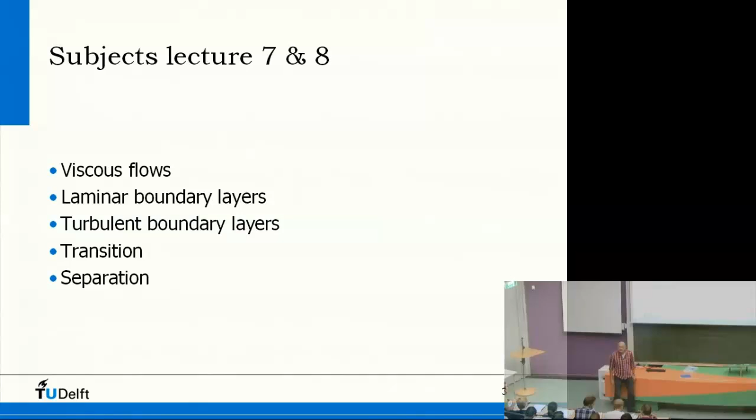So it's about viscous flows, laminar and turbulent boundary layers. You have read all about that, maybe heard all about that from Professor Bijl.

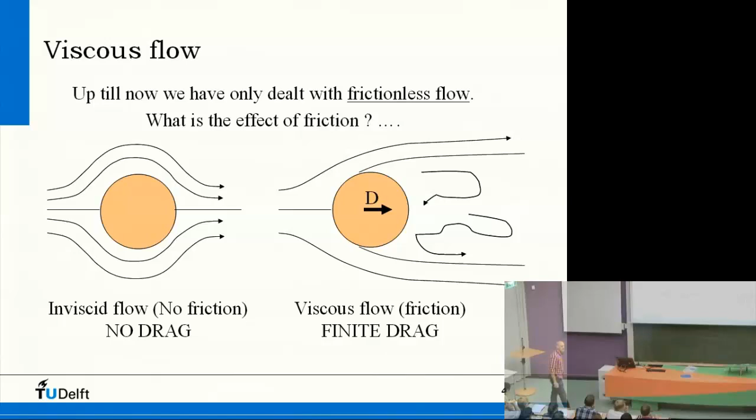And if you come to that conclusion, of course there's no drag, because the biggest force that is acting here is the pressure drag. There's so much pressure drag here, more than viscous drag, that there's a very high drag force on a sphere or on a cylinder. So this was called the paradox of D'Alembert, because he saw that there was drag and he couldn't calculate it. Of course, in due time, people could do that, but in the time of D'Alembert, which is some 200 years ago, that was impossible. Okay, so in real life there is friction, but not only friction, also pressure drag.

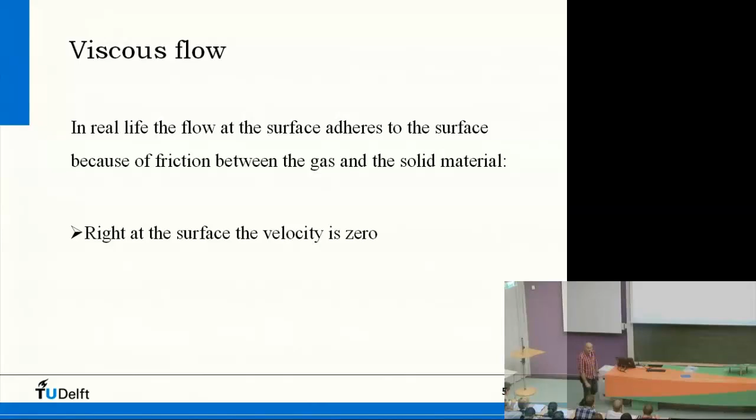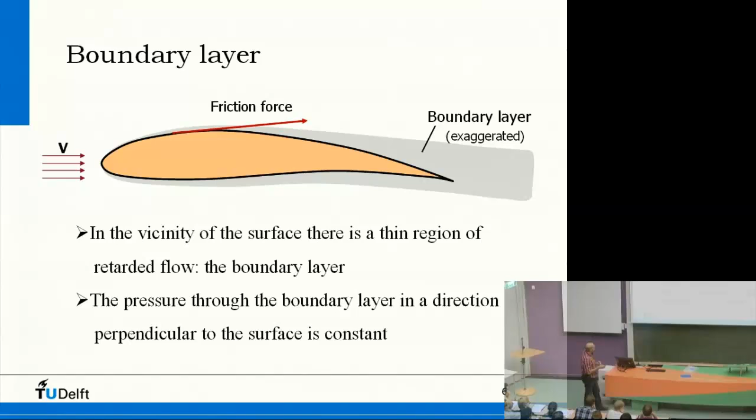You've seen the boundary layer, exaggerated here, but the boundary layer is this piece of the flow very close to the surface that is the result of the friction of the molecules of the air or the gas or the fluid along the surface. And that creates a boundary layer, so a thin film of air that is retarded by the friction force. Inside the boundary layer, because there is friction, we saw that if you look at how Bernoulli's law was derived, then you excluded friction. So, because in the boundary layer there is friction, you cannot calculate with Bernoulli's law. It's not valid there. Well, I will skip this because you've seen that.

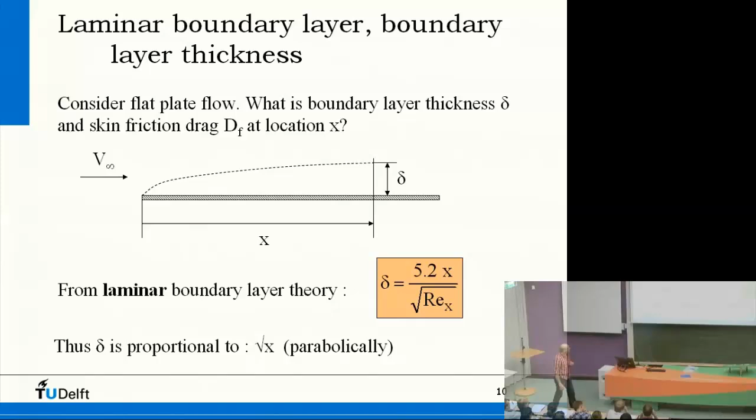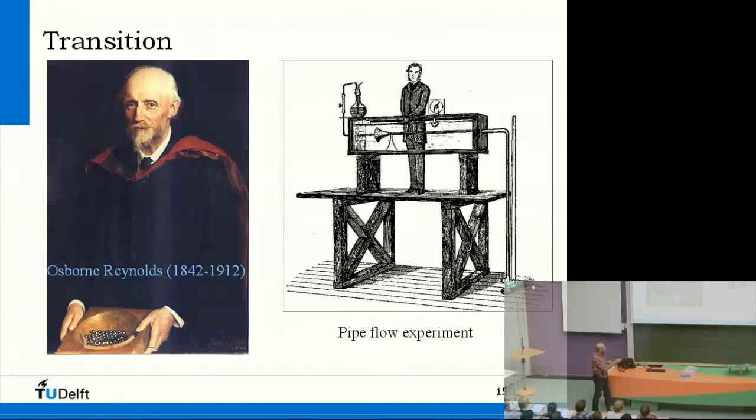Osborne Reynolds was the guy that looked very closely at the type of flow in a pipe. So there's his setup. There was this pipe here with an inlet, and he put dye into the flow. And what he saw at very low velocities, a combination of the velocity and the friction, was that there was this very nice layer of fluid going through the pipe. But when he increased the velocity, and this so-called Reynolds number was increased, then he saw that at first there was this very thin, very nice layer, and then suddenly there was what we later call turbulent flow inside the pipe. And if he further increased the velocity, then this phenomenon occurred earlier in the pipe.

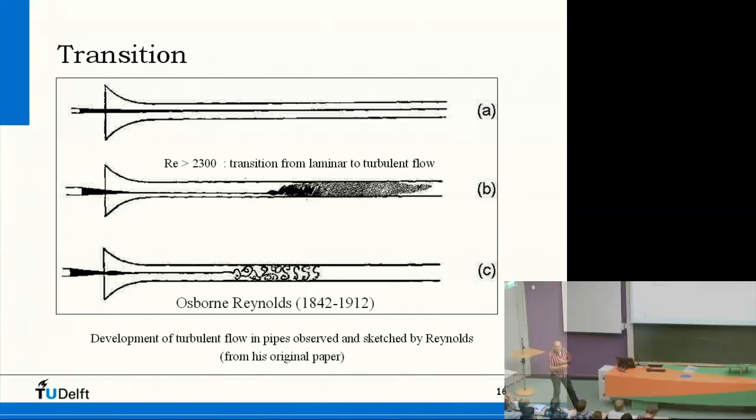And then he came up with his Reynolds number, saying that whenever you have two configurations, two setups, for instance a wind tunnel and a free flight, and if the Reynolds number is constant, then the ratio of the mechanical forces, so the mass forces and the viscous forces, are the same in both situations. So you can compare both situations.

Very nice, because if you want to do wind tunnel measurements and you have a certain chord and you want to replace that chord in the wind tunnel, and you don't have a big wind tunnel, so you must have smaller chords, then if you keep the Reynolds number constant, then you can compare the flows. Everything that counts for the wind tunnel also counts for the free flight.

And the Reynolds number says something about the velocity times a certain characteristic length. And for wings, that's of course the chord. So velocity times chord divided by something that says anything about the viscous flow. So honey, for instance, is very viscous. So this kinematic viscosity, nu, is very high. And gases, of course, are very non-viscous. So if these ratios of these parameters are constant, then you can calculate with the same forces. Very convenient for wind tunnel measurements.

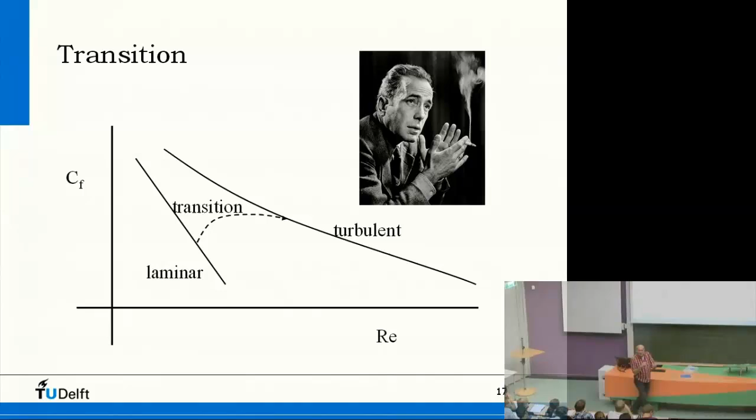And transition will not take place suddenly, but somewhere in the flow you see those turbulent spots. They call it turbulent spots, that here and there you see some small vortices coming up in the flow. And if you put a microphone inside this flow, it sounds strange, but it's really the sound that you hear. A laminar boundary layer is just a sort of small, soft whistling sound. And then if you have a turbulent boundary layer, it's a rumbling sound. And somewhere in between, these small vortices, these turbulent spots, give you the idea that turbulence is coming on.

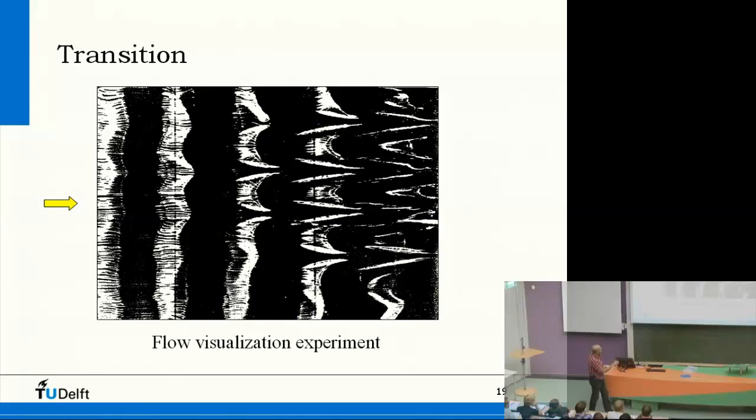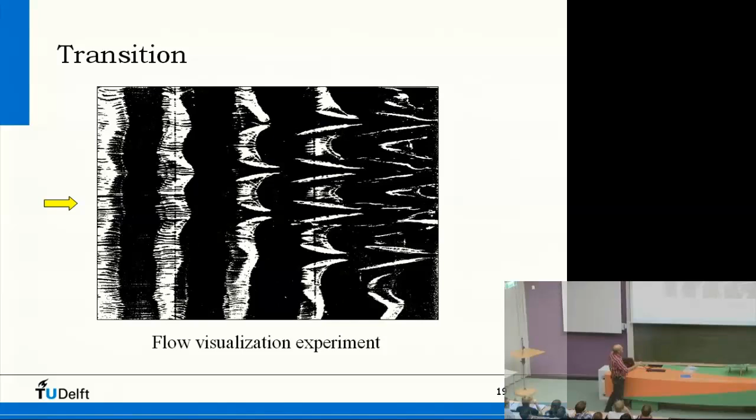And that's what you see here. This is this wavy character, these Tollmien-Schlichting waves in the laminar boundary layer that get bigger in amplitude as the flow goes along the flat plate. And here you see these turbulent spots, and here we have a fully turbulent flow. So what you see here, these turbulent spots, vortex breakdown, and here these waves, Tollmien-Schlichting waves. These Tollmien-Schlichting waves have a certain frequency, and this frequency depends on what kind of object it is. A flat plate is different than an airfoil. And if you would put a speaker here with a certain frequency, then you can just increase this amplitude.

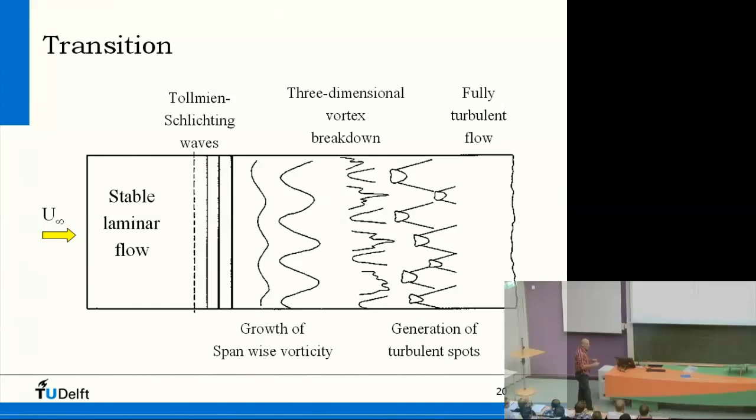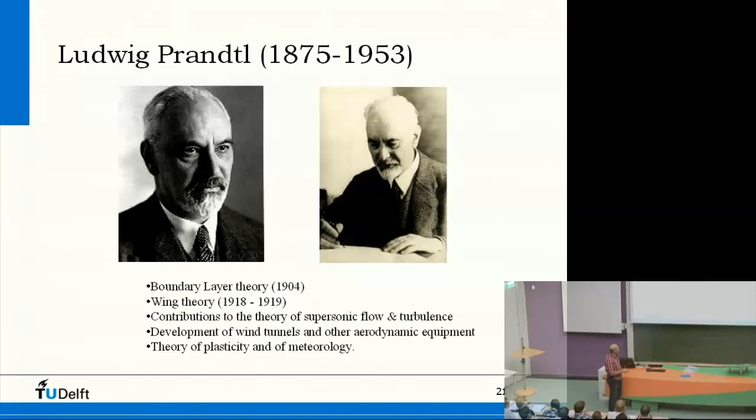So this transition process can be influenced by artificial means, by generating a frequency that is just this frequency of this wave, so that it gets bigger and bigger, and you have early transition, early turbulence. But also, you can influence this wave by putting dirt on it, for instance, or grit, very small particles of dirt. That can also influence this wave so that it gives an earlier turbulence. This Ludwig Prandtl did very fine work on this subject, also on wing theory and stuff like that. Very renowned scientist.

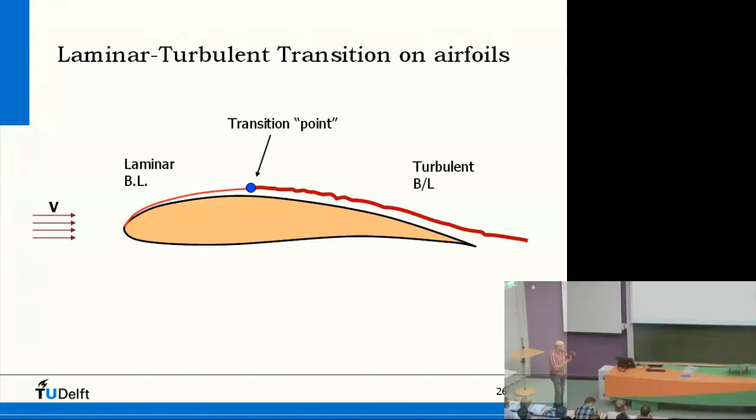Okay, so here we have it. If you have a wing, an airfoil of a wing, then first we have this laminar boundary layer here, and then we have the transition location, and then we have turbulence here, turbulent boundary layer. And what we have seen, if you looked at the friction coefficient, that of a laminar boundary layer is lower than of a turbulent boundary layer. So the turbulent boundary layer is much thicker, and it has a high friction coefficient.

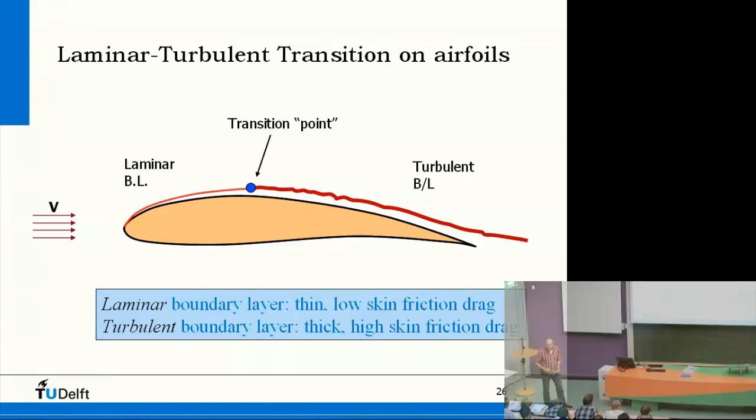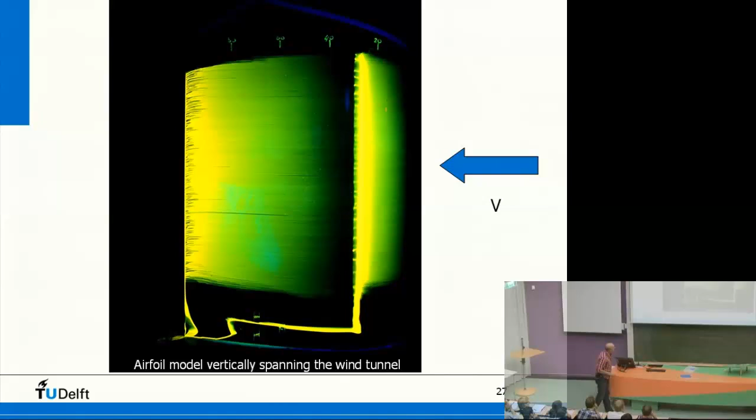And what you see here is the laminar boundary layer, and somewhere here you see that the laminar boundary layer stops, because here we have turbulence. And like I said, the friction coefficient of a turbulent boundary layer is much bigger. So it sweeps all the flow away from where it is at that point. So when it is turbulent here, all the oil is swept away and taken to a further located exit station. So you see that from this particular oil picture, you can see that the transition location is here. So there's turbulence. Okay, it's a little bit difficult to see. Maybe I can lower the light a little bit.

This is another picture. It's a more recent picture. And the flow comes from this side. This is the lower surface, while the other picture was the upper surface. This is the lower surface of a wind turbine airfoil. And you see that at a Reynolds number of 4 million, angle of -2, there's this transition location at 40% of the chord. The same you see here, this black area. There is the turbulent boundary layer starting towards the trailing edge.

So this is again 40, but if you then go to -6, then you see the oil being swept away. Here it is. And the transition location is moving forward. You see that the oil is moving in that direction, and the new transition location is this one. For -6, this is about 33% of the chord. So on this picture you can see that whenever you change the angle of attack, the transition location moves, on the upper surface as well as on the lower surface.

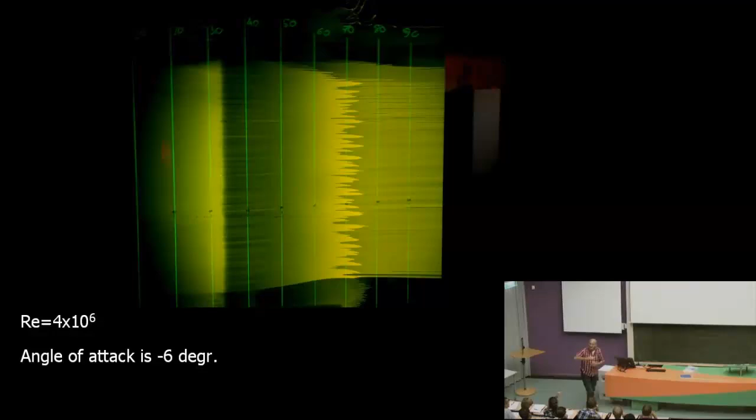And this was attached flow, so there's no separation. This is just a laminar boundary layer and a turbulent boundary layer flowing along the surface of an airfoil. And then what you see, if you look at the lift as a function of the angle of attack, is a linear relation between the lift coefficient and the angle of attack. And at some point here, the turbulent boundary layer is very thick. And then if you increase the angle of attack more, there is separation. So the turbulent boundary layer cannot follow the contour of the airfoil anymore, and it separates. It goes straight to an undisturbed situation.

And then, because the flow is not so curved anymore, the lift, of course, comes from giving a downward velocity to the airstream, which makes that you get an upward force on your airfoil. So because there is separation, the lift goes down.

And in this separated region, you can also make flow pictures. And then you see something like this. This is the leading edge, this is the trailing edge. This here is the laminar boundary layer, so it stops at about 10 to 15%. And then we have a turbulent boundary layer, and the turbulent boundary layer separates, and it makes very strange patterns, what we call stall cells. So it's a three-dimensional pattern, although it's a two-dimensional test between walls. So there's no wing or the like, but it's just an airfoil model stretched between both walls. So it's two-dimensional, in fact. But because of this separation process, you see all kinds of strange stall cells developing here.

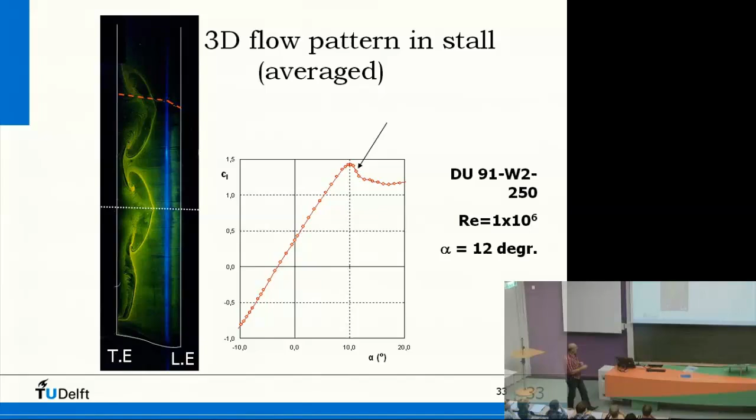Okay. The majority of the flow is, of course, turbulent. Because if you look at, for instance, wind turbine blades, they have a very nice surface, but they rotate through the earth boundary layer, and there are a lot of flies and bugs and so on that collide onto the leading edge, and you have a lot of roughness on there. So the initial laminar boundary layer that would be there is turbulent because of the fact that there is a lot of disturbance on the airfoil itself.

What you see on an airfoil like this, a laminar flow airfoil, is that you have a favorable pressure gradient. If you have a pressure distribution along an airfoil, then at some point you have the highest velocity on the airfoil, and like Bernoulli says, high velocity means low pressure. So low pressure somewhere on the airfoil. But this low pressure has to go up to an undisturbed pressure somewhere behind the airfoil. So there is a not so favorable pressure gradient between the highest velocity, so the lowest pressure, and the high pressure somewhere behind the airfoil. So there's an adverse pressure gradient.

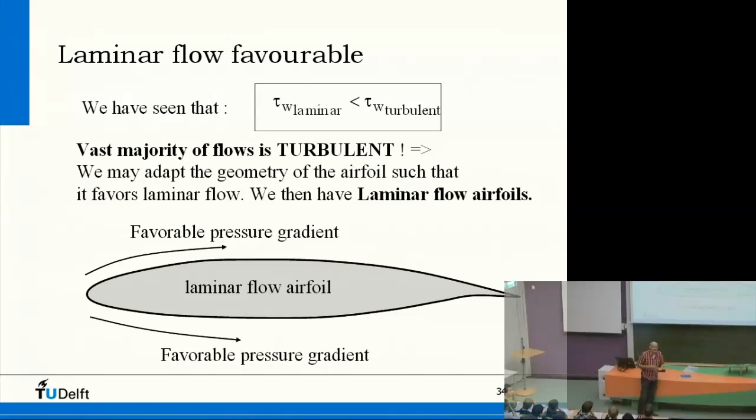In fact, there is a force pushing all the molecules in the boundary layer back because of this pressure gradient. First, you help these molecules in the boundary layer, because between here, the stagnation point, and the thickest point, the flow is accelerated, velocity goes up, and the pressure goes down, so you more or less suck the molecules to a certain position. But then, behind the thickest point, we have this adverse pressure gradient, so the molecules are pushed back. And at some point, if this pressure gradient is very high, then the velocity goes down and down and down in the boundary layer, and at some point the velocity is zero at the surface, and then you have separation. This is the process of separation.

This is a calculation, but in much detail. And what you see here is, in fact, laminar separation. So it's not only that the turbulent boundary layer can separate, but if you have a low enough Reynolds number, so very viscous flows, so low velocities and very viscous air, for instance, of low temperature and stuff like that, then you also have laminar separation, which means that the flow will turn turbulent somewhere in the air, not on the model, but somewhere in the air. And that is what you see here.

This is a sphere, or maybe a cylinder, but then a cut of that. And you see that this laminar boundary layer is separating here, somewhere at the thickest point. And it makes a vortex. And the point is that because this vortex, this separation is there, the flow is different at the upper surface and at the lower surface. And it's so much different that when this occurs here, there will not be a vortex there, and vice versa. So when this vortex is gone, then here a vortex will develop. And I think that Professor Bijl showed you also this picture of this Karman vortex street.

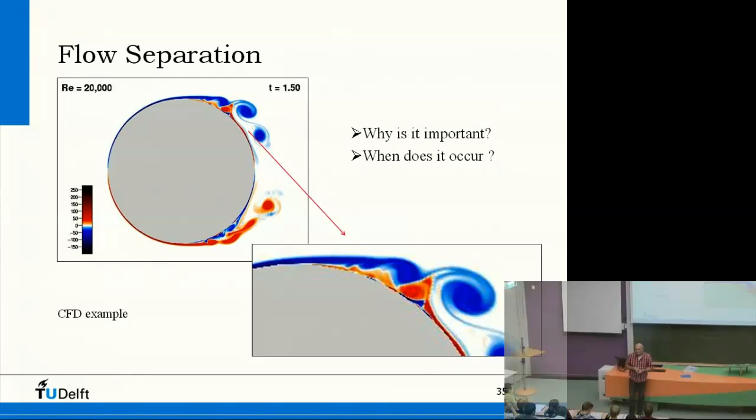But it's very difficult, because you've seen that the moment you have turbulence, it's very difficult to go to a laminar flow again. So relaminarization is very difficult. You have to prevent that from happening, more or less. Okay, separation. You've seen this.

Here we see this process again. You see this is a boundary layer here, and you lose velocity there, you lose energy, and at some point the velocity is 0 here. And the next step is that there is a negative velocity here. So you have this vortex here that gives you negative velocity, and the flow separates from the surface.

Got a question. You know shark skin, and how can shark skin prevent the water from building up vortices? How can shark skin influence the boundary layer to reduce the vortices or to increase the vortices? That is a very difficult question, since we do not yet talk about sublayers in the boundary layer. What I tell you here is one boundary layer, but in reality there is a difference between the very, very small layer on the surface and the one above that, within the boundary layer. We will see something about the influence of roughness on the flow in a moment. It's not the same, but the shark skin works a little bit differently.

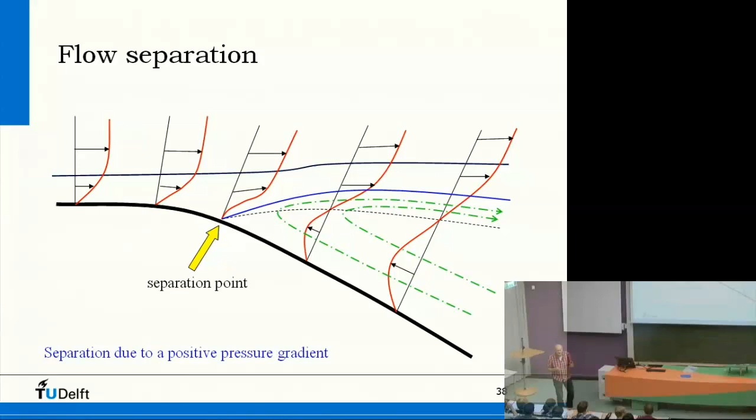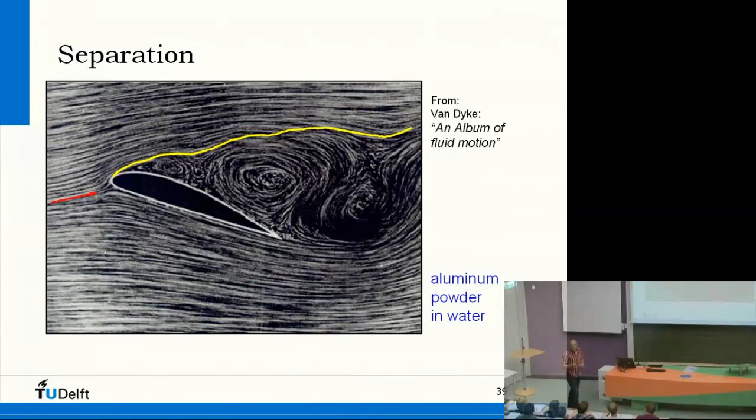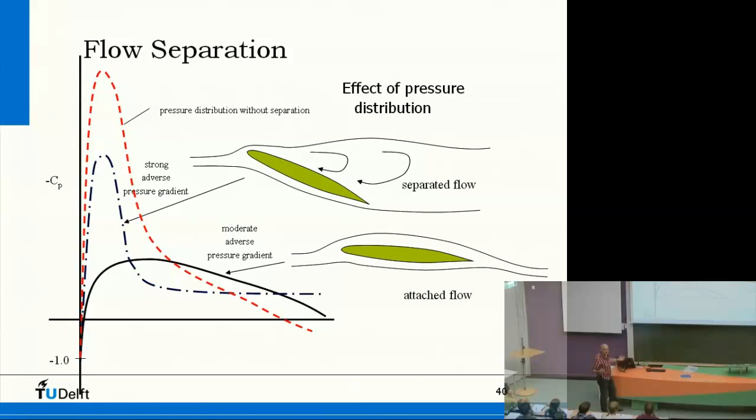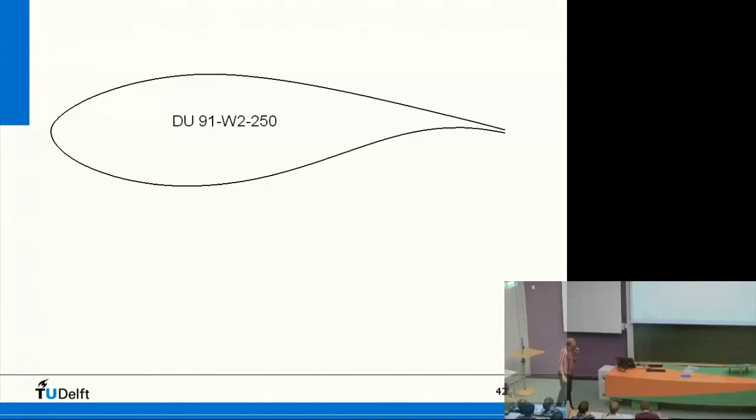Here we see DU91, which is a wind turbine airfoil. And if you closely look at most wind turbine blades, then you will see at the big blades around the world, I think in 60% of all the blades around the world, you see this airfoil somewhere halfway along the blade. It's a very, very multi-used airfoil, I would say.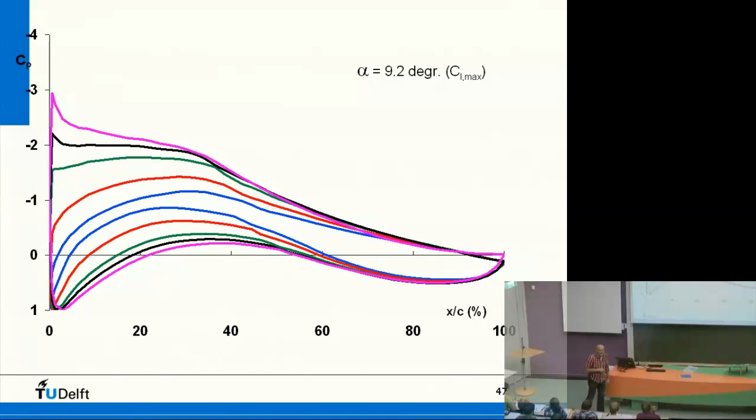And if we then look at the transition location, which can be measured, I told you that the turbulent boundary layer can be detected if you put a microphone in the flow and listen to the rumbling sound. If you go from whistling to rumbling, then somewhere in between there is this transition location. In this case we did that, and these are the transition locations. And you see that the moment you increase the angle of attack, the transition location moves forward. From 0 degrees to, say, 9.2 degrees, transition moves forward.

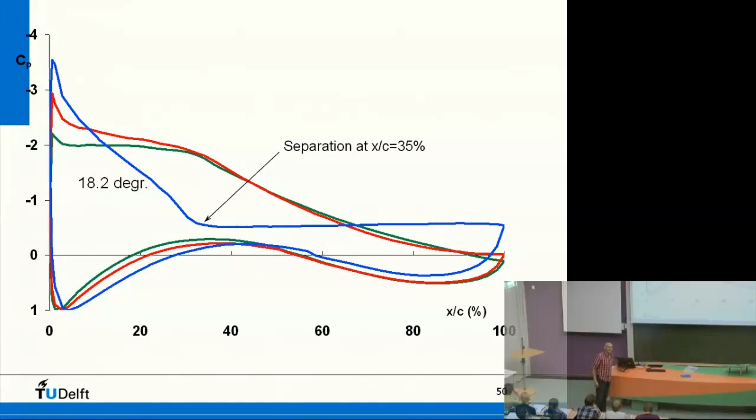And at that point here, at CL max, you see there starts some separation at the trailing edge. At 92% of the chord, there is this straight plateau here, and the separation moves. If you go further in angle of attack, you will see this moving forward. For 18 degrees, we have separation around 35% of the chord. Some pressure plateau here, which means that you have a lot of drag, because this separation means a lot of turbulence, a lot of temperature loss, velocity loss and stuff like that. So it's very high drag.

And why in general do we not like separation? Because a separated boundary layer can influence the flow around all kinds of stabilizers, other wings, for instance. If you have a vertical tailplane here, for instance, and you have separation at a large angle of attack, then flaps, for instance, can get inefficient because of flow separation. So in general, flow separation is unwanted.

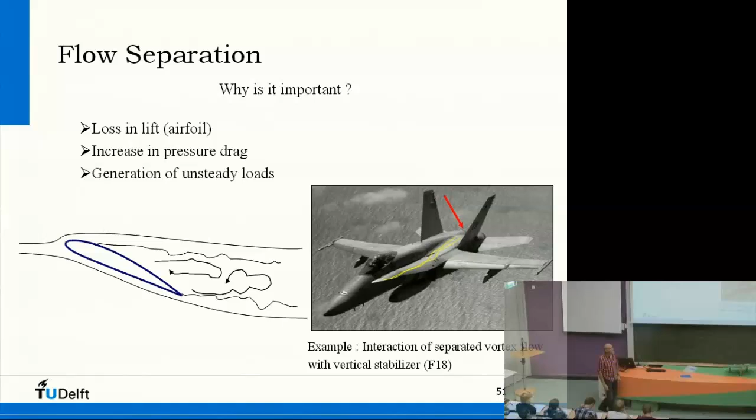Okay, but if we look at a laminar boundary layer profile and a turbulent boundary layer profile, we see that a turbulent boundary layer profile has a lot more velocity here, and that's of course why the friction is so high. But if the profile looks like this, then there is a lot more kinetic energy, because the velocity is higher near the surface. And if you talk about adverse pressure gradients, so this force that pushes the molecules back, then a boundary layer that has this character has more energy to flow into this adverse pressure gradient, to get further on the airfoil, despite this pushing back of the pressure gradient. So, if a boundary layer is turbulent, it can reach the back of the airfoil.

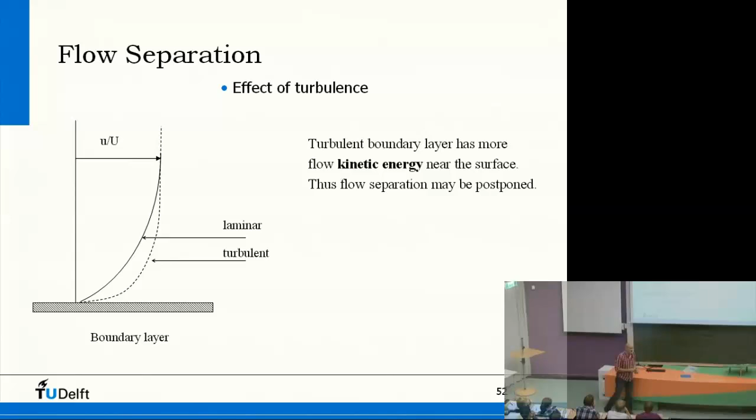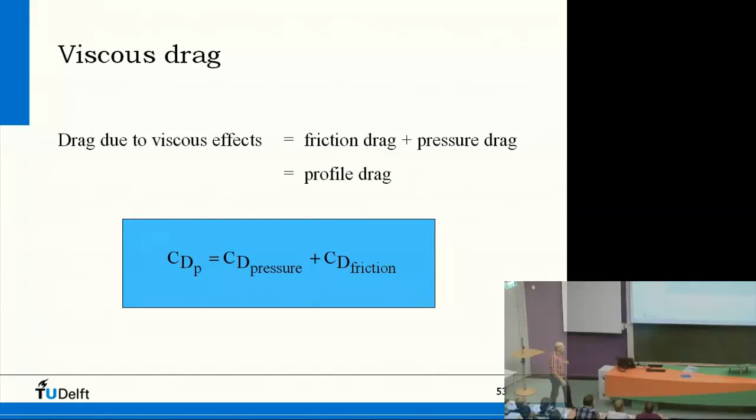And a laminar boundary layer might not be able to do that, and that is because of the fact that there is more kinetic energy here. Well, if we look at the drag of an airfoil, then we see this friction drag and pressure drag, which gives you the profile drag. Okay.

And now the relation with the Reynolds number. This is in particular for this airfoil, but you see flows alike on many airfoils. So this is a good example. If you are at a Reynolds number of 300,000, which we call low, then you'll see that there's a laminar boundary layer here, and the laminar boundary layer separates from the surface, and it gives a big, thick area of distorted flow, and you see turbulence at the transition location off the surface.

So somewhere in the air, where the laminar boundary layer is located, you see this transition to turbulence. And if you go, in this case, to a higher velocity, then you will see that this point will move forward and go right here, and in this situation, the boundary layer will stay attached, because it's turbulent. Here, the laminar boundary layer does not have enough energy to go turbulent, so it doesn't have enough energy to go all the way to the trailing edge, and here it has.

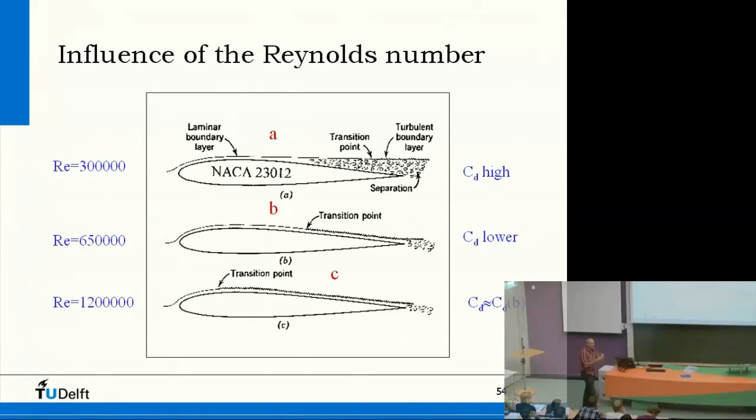And here, at this Reynolds number, 1.2 million, you see the transition location moving forward. So what you see here is that if you increase the angle of attack, then the transition location moves forward to the nose. But if you have the same angle of attack and you increase the Reynolds number, then this transition location also moves forward. And why is that? Because these Tollmien-Schlichting waves, these waves in the laminar boundary layer, get unsteady when the velocity goes up. So they create more turbulence, earlier turbulence, so that the transition location moves more forward with Reynolds number.

But not every shape reacts the same. We've seen a flat plate, we've seen an airfoil, and this is the Reynolds number here. Reynolds number is the velocity times a characteristic length divided by the kinematic viscosity. When you talk about spheres and cylinders, of course that's the diameter d. When you talk about a flat plate, then you talk about the length of the plate, and when you talk about airfoils, then you talk about the chord. So that's the characteristic length. And the kinematic viscosity is at standard conditions something like 15 times 10 to the power minus 6.

Here we see, if you have a flat plate normal to the flow, can be a round plate, can be a square plate, and you increase the Reynolds number, so you increase the velocity, then nothing happens. The transition is somewhere here, and the separation is always at this point here. So nothing happens, it's just the same flow pattern that you see at every Reynolds number. If you look at the flat plate, at the lower Reynolds number the flat plate is laminar, and here it is turbulent, and here you see this transition from laminar to turbulent. So that's 90 degrees, normal to the flow. This is aligned with the flow.

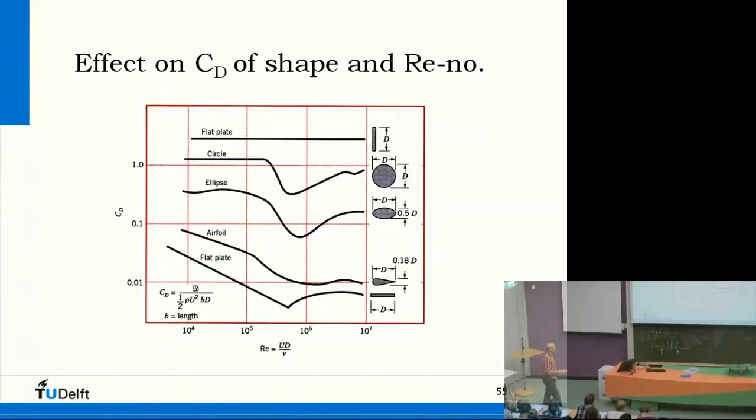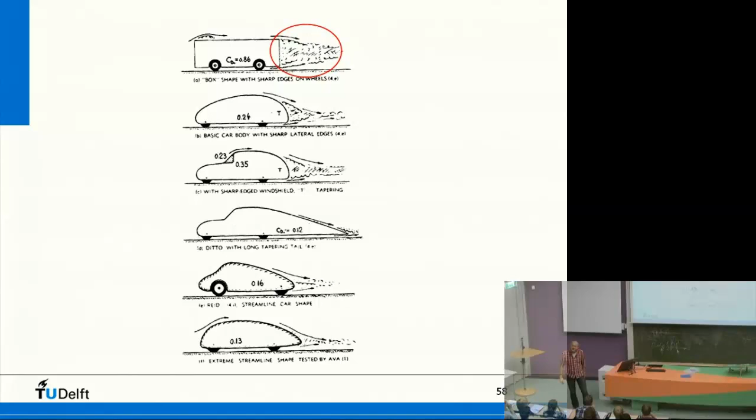And if you have an inlet with a sort of channel towards the back, then this channel also has internal friction. So the net result may be complicated, because when you have containers, for instance, you cannot move a channel inside. So you may have a very complicated structure, which maybe does not even give a drag reduction. This is a point of discussion or research if you look at manufacturers of trucks, of course, because they want to reduce the fuel consumption. And when you get down this pressure drag, then you can decrease the fuel consumption very rapidly.

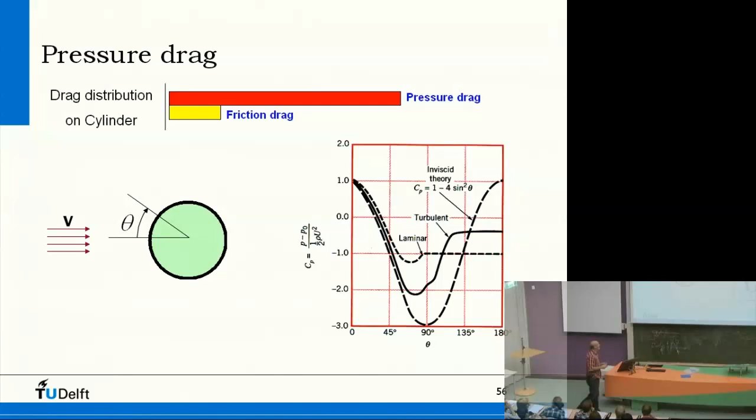What happens is that this initial laminar boundary layer is getting turbulent here, and this turbulent boundary layer can negotiate this adverse pressure gradient much better, so then it separates later. So the idea is that whenever you have a turbulent boundary layer, the pressure drag reduces. And this is exactly what happens here. At this Reynolds number, the flow turns from laminar to turbulent in the natural sense, right? So that's when it happens. When this critical Reynolds number is exceeded, you have a turbulent flow right in front of the thickest point, and then the flow can round this thickest point and stay attached for a long time.

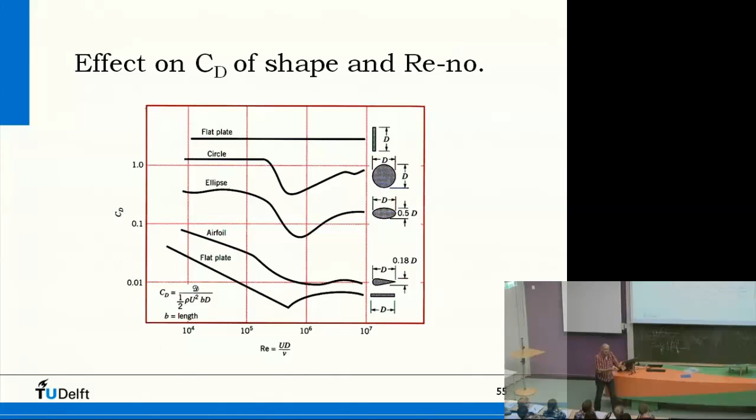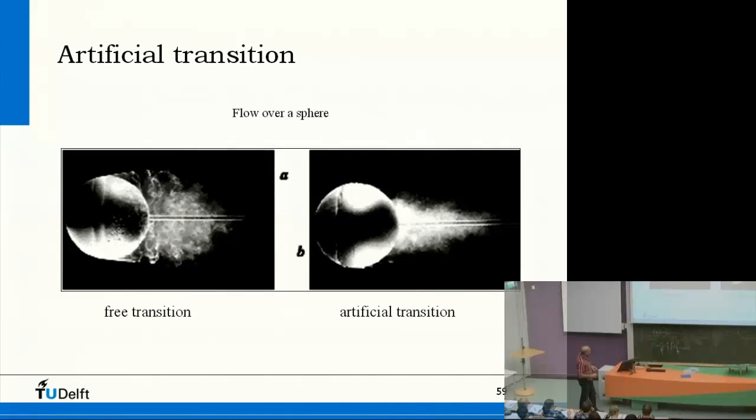And because of the fact that this happens when you have a turbulent boundary layer, by artificial means you can also try to reduce the drag of a cylinder or a sphere. Since you need a turbulent boundary layer, you can try to make the laminar boundary layer turbulent. And that's what happened here. You make it turbulent by putting something there, and it can be a ring or whatever disturbance you have, and then it's turbulent, and this is happening. Okay. No wonder that you see a lot of applications of this phenomenon.

In the first months of the golf sport, they found out that used balls came much further than the new ones because the new ones did not have any dimples. So the used balls had scratches and stuff like that, and they had an earlier turbulent boundary layer. And in the first part of the flight, they came much further than the laminar ones. So they found out that there should be something like 328 dimples, or I don't know how many, but if you have nothing to do, you could count them. And the form means these are circles, but they also have octagons, and whenever it disturbs the flow in a good way, then.

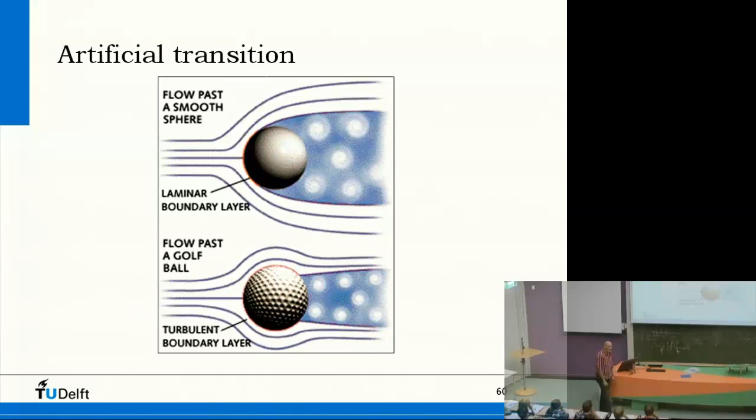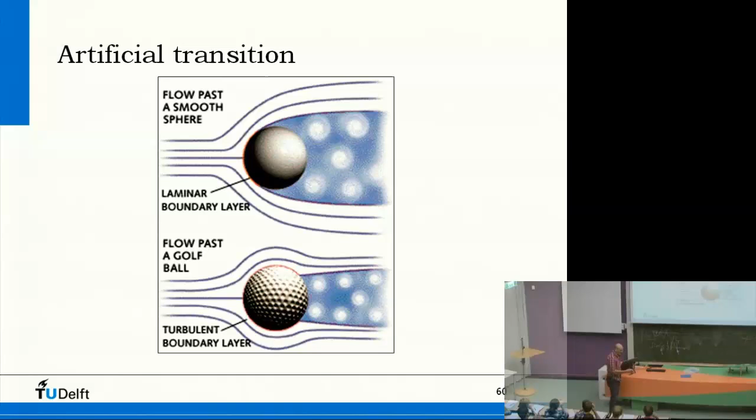But okay, so a smooth sphere is laminar, and a rough sphere or a rough cylinder is turbulent, and it gives a lot less pressure drag. Well, you see that with baseballs as well, and tennis balls, those hairy tennis balls, that's the same. Okay. Well, now there's a nice application, namely the application in sports. This was an investigation when you were very young. I think you were 7 or 8.

And that was, well, skating in Holland is, of course, a national sport. It's a big national sport. And we like to think that it's a very big global sport as well, but it isn't, unfortunately. But anyway, whenever there are Olympics, the national union thinks of ways to try to get an advantage over others. And this was one of the investigations. This was a guy that came to us, and this was the predecessor of our present open jet facility. And this is a skater, a professional skater in this case.

This is a colleague of mine, Deo Veltas. This is me at a very young age. A little bit more hair. You can't see that, but I'll tell you. But anyway, what we do here is we use a stick and a tuft to localize the disturbance at the lower leg. And this lower leg is in fact a cylinder, like the head is more or less a sphere. And what you see is that this lower leg also behaves as a cylinder. I mean, it has some deviations from a cylinder, but all in all, it is the same blunt shape.

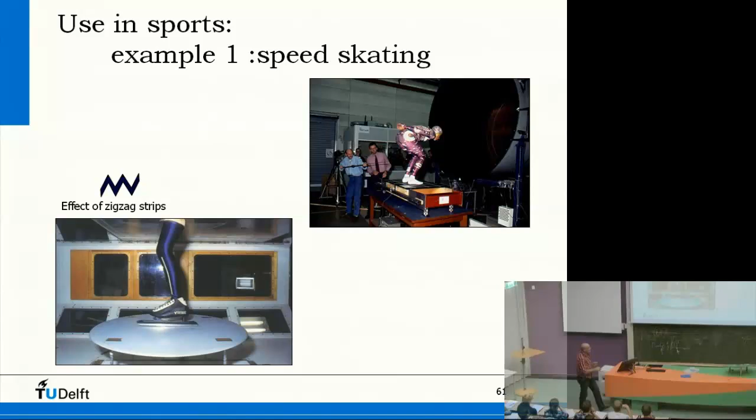And that's of course no wonder, because it works like that. This is laminar, the first part is laminar, and then when you put this on, you disturb the flow, it gets turbulent, and the pressure drag goes down. And here it is. This guy was this Dutchman. He skated for Belgium because he was not good enough for the Dutch team. But in fact, he was very good at the Nagano Winter Olympics. So it was 1998, right?

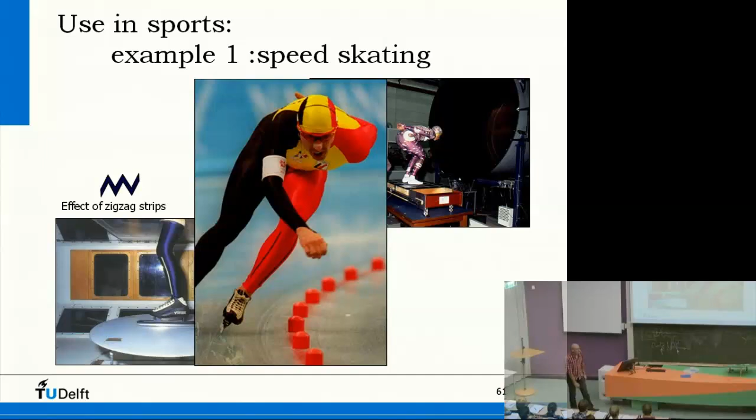What you can see here are these small strips on the lower leg and here on the cap, giving a drag reduction, right? So this guy was first, and he skated off on the 5K, the 5,000 meters. That was the first day, on a Sunday, I remember very well. First day he skated off, I think, something like 14 seconds of his personal best, which was a world record at that time. The world record lasted about, how long does it take for a 5K? Something like 7 minutes. So it lasted 7 minutes because the second one, a Dutchman, beat it with the same strips and stuff like that, by I think 0.08 of a second. And the third, Gianni Romme, he was also record holder at that time, and he skated off, I think, something like 8 seconds of his personal best.

And this is what happened. Here's the CD, here is the Reynolds number, and if you have a smooth cylinder, then in the natural sense, the drag goes down like this. So just by increasing the velocity, because we have just one cylinder, one situation, air, same temperature, we just increase the velocity, and by that we increase the Reynolds number. And it goes down here, so the critical Reynolds number is somewhere here. But if you take this Lycra stuff, its material is Coolmax, then this is just a cylinder, you know? Just a cylinder to look at it. And when you take the Lycra, you go down like this. But if you look at the lower leg, the average Reynolds number of the lower leg is like this. So you have to do something to get to a low drag.

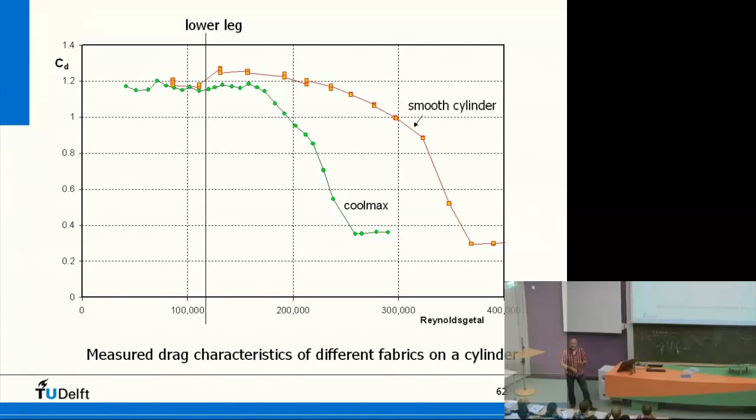Well, you can do that by taking not a very smooth cloth, but cloth with roughness. And then you have these, there you have the characteristics. Rough cloth, right? Here. So there are various types of cloth that you can use to trip the flow. The problem is that you cannot go as low as in the natural sense. So the moment you do it artificially, it will cost you the very low CD. So all in all, you cannot come lower than this.

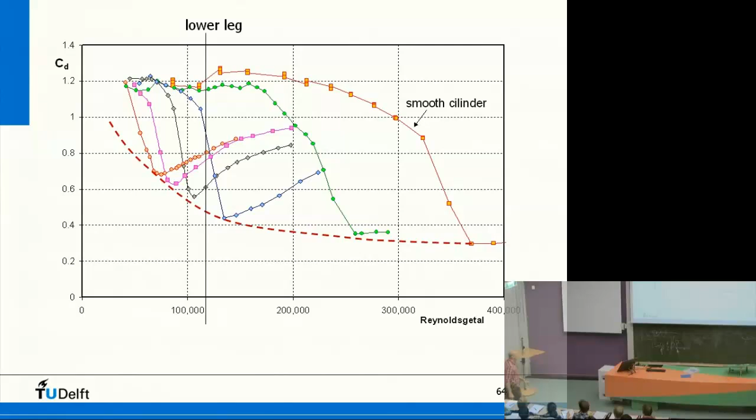Yeah, there's a question? Does it also work on the human skin? The moment you do have hairy legs, then it works. Yeah, it does. And the nice thing is, for cycling it does, yeah. So for cycling you should have hairy legs. But what they do, because they get massaged every now and then, they just shave the legs. And that's bad. But yeah, well.

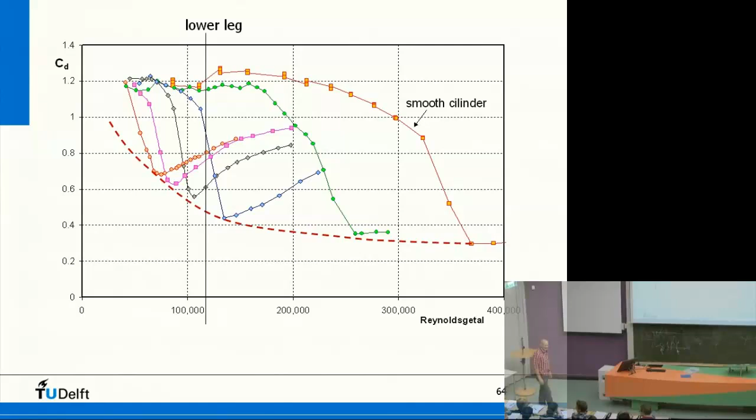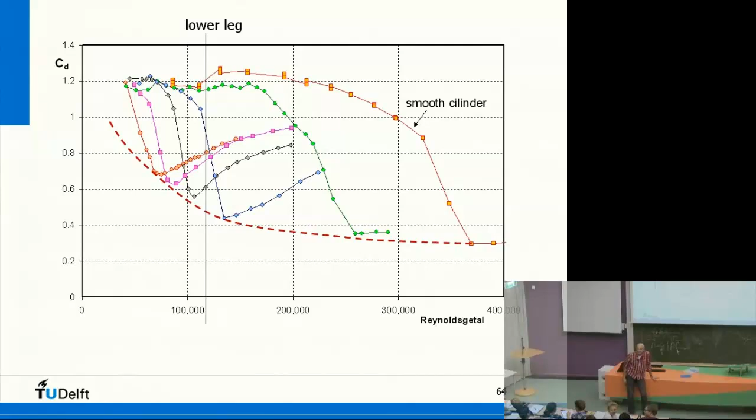You're thinking of women cycling. Yeah, yeah. Okay. Let's move on.

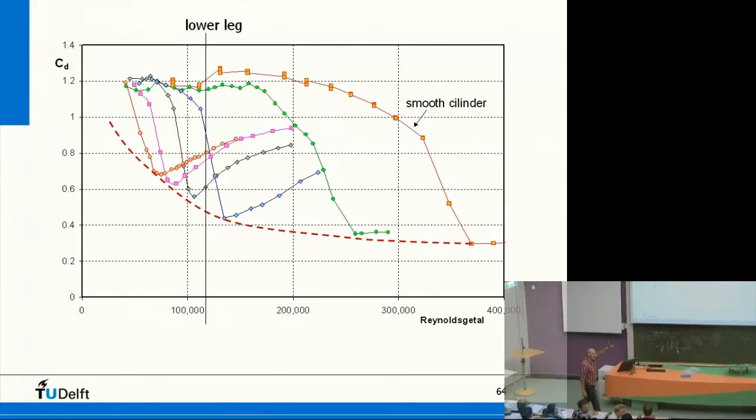Okay, so when you apply different sorts of cloth, you can have this effect. If we put the strips on, these zigzags, then you see something like this. Coolmax plus strips. So this is this piece of cloth here, and if you put strips on both sides of the cylinder, then you see this.

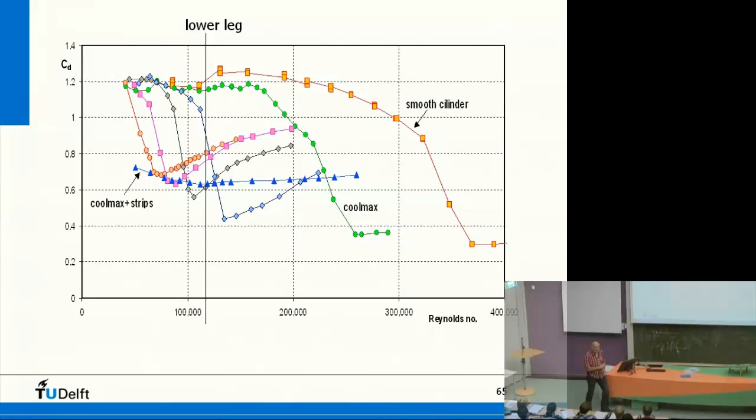Which means that you cannot go as low as this one, but across an entire range of Reynolds numbers, you are very low. So if you are a designer of this type of suits, and you would like to use a certain roughness, then you have to know exactly what the average Reynolds number is at which they skate, for instance, to apply this one, because this one has a very peaky character. If you do not know so much about these circumstances, then you use this, because this is a constant over the entire range of Reynolds numbers. All right.

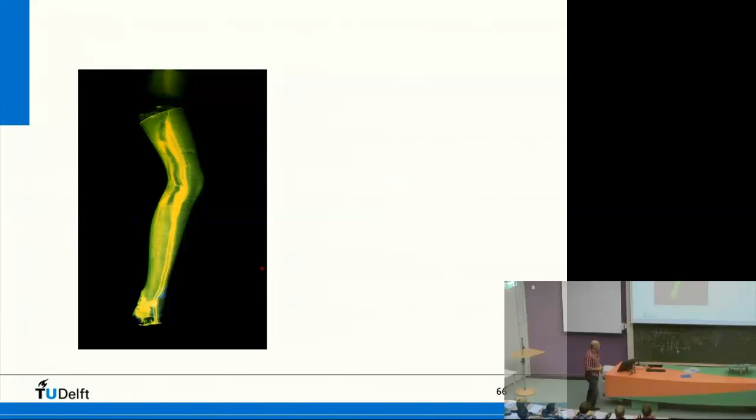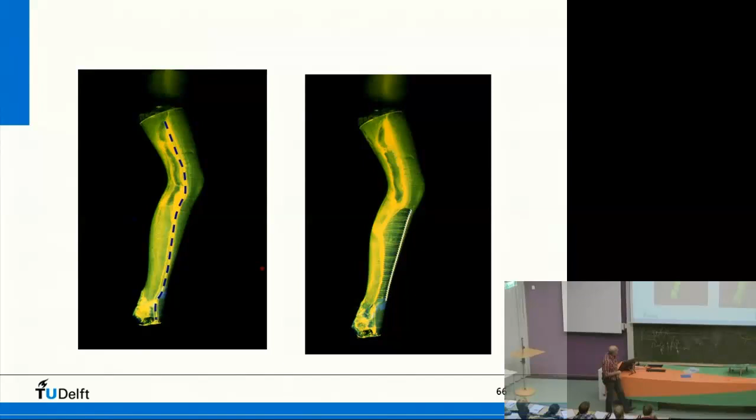Here's the separation line. And if we look at the leg with the strips, you see here it is, about 30 degrees from the front. And then you see those stripes here. These are the vortices that come from the strips. And the separation line is there. So the difference is this.

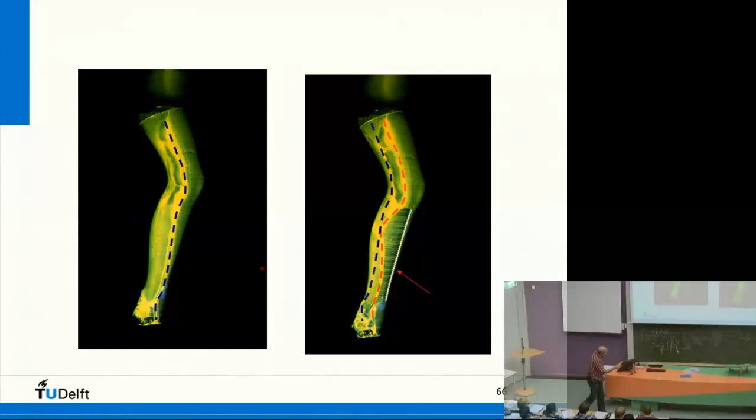The upper leg, there is no strip, and then it's the same. And why don't we do the upper leg in this case? Because it changes position so much. If you look at a skater, it does like this. So the lower leg is mostly in a frontal position, and the upper leg is a little bit more difficult. So that's why we put it there at the lower leg in first instance. But this is the difference. And this difference is huge if you look at the pressure drag.

Well, Gianni Romme was a famous guy, and he skated 8.4 seconds off his world record in the Nagano Games. There he is, 6:22. So this is the gain he had relative to the year before. If you do a calculation, what you can gain with these lower legs that have the strips is about 4 to 5% of the total drag of the skater. If you look at the skater's drag, then 80% is aerodynamic drag and 20% is ice friction. So this 80%, of course, depends on the frontal area. That's why they skate like this and not like that.

So frontal area is important, but because they are like this, the legs form a very big part of the total drag. And that's why when you do something about the legs, you can get this 4 to 5% off the total drag, which means 0.5 seconds per lap. A lap is about 32 seconds, so 0.5 seconds per lap without training, without anything. You don't have to do anything for it. Right? So, okay. And it was a big hit.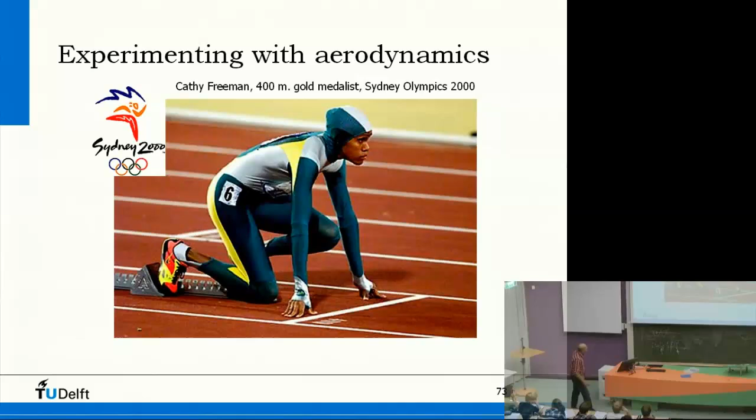Okay, so if you look at skaters right now, most of them don't use any strips. Only some Dutch use the strip on the head. And why is that? Because the effect of the strips is already in the roughness of the cloth of the suits, and mostly it's Nike that sells these suits. But in general, they have done nothing on the head. And if you do some measurements, there is still some reducing effect on the head if you do something about that. So it's a sphere, of course, more or less, and that it works.

Okay, and then the last case study, Usain Bolt, just to show you how you calculate if the effect works or not. Usain Bolt is a good athlete, of course. He runs the 100 meters for men in world record. He's a world record holder, which world record dates from one year ago, I think, Berlin.

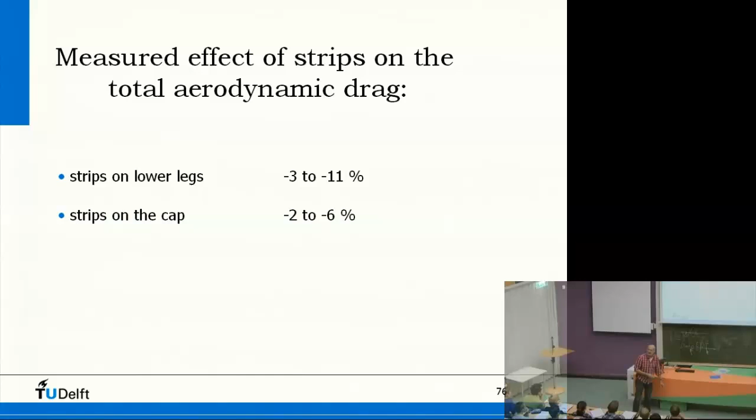Okay, if we look at the measured effect of these strips, or of rough cloth, then on the lower legs it's about 3 to 11%, depending on how big, how small, and so on. Strips on the cap, 2 to 6%. Suppose we take something like 5 to 6% drag reduction on the lower legs and apply that to an athlete like Usain Bolt, right? So here we have him. Here, this is the world record, 9.58.

And mind you, you see his hands, he runs like this, not like this, because that is a very low frontal area. If you run like this, then there's a big frontal area. This way, you just cut through the air, you know. So all these sprinters do that. Okay, so here he is, and let's look at the power that he needs to get this fast, right?

So here we are. The air density there, if you look at the temperature and the barometric pressure, was 1.20. His length is 1.96, his mass 86 kilos, and his total CD times S is 0.82. If you look at the drag, the drag force is CD times half rho v squared times S. And CD times S is in general what you are looking for. So CD times S is 0.82, and his legs are a part of that. It is 0.246 CD times S. So it is a sort of drag coefficient type.

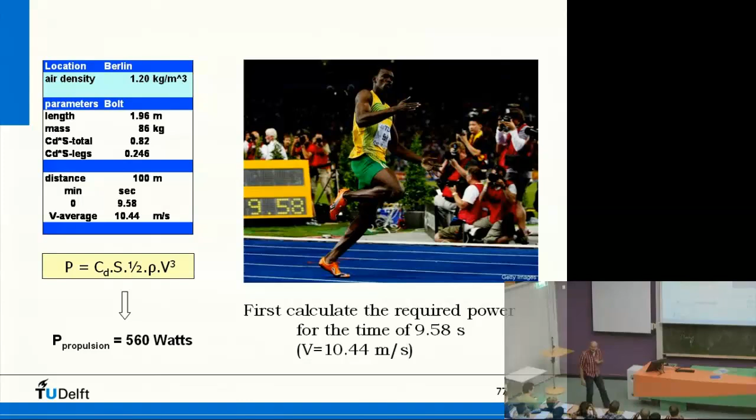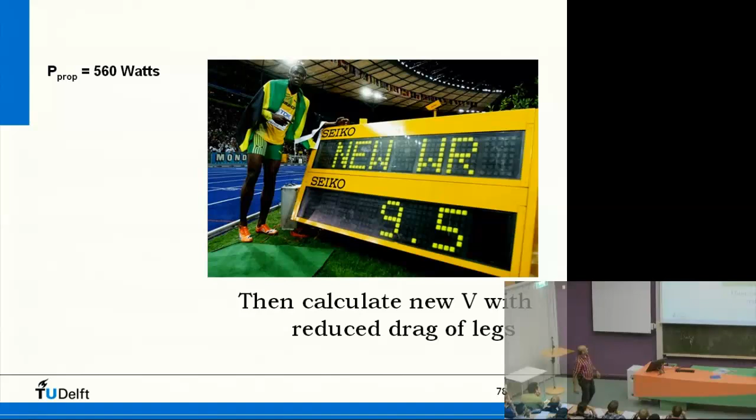Okay. If we reduce the drag of his lower legs by 6%, then we see it like this. So this is the power that he needs, the same power. The air density is of course the same and everything is the same except the CD times S of the legs, which is minus 6%. And then what is the velocity that he gets when he has this power and this CD times S? It's 10.479 meters per second. So it's 9.54. So that is 4/100ths of a second better than the world record without doing anything, except wearing a suit which gives his legs a lower drag.

I'm not sure if it's allowed or not, but this is a sort of calculation you can do. It's a sort of tempting calculation, also for manufacturers of suits, maybe. Right? Okay. That's it.

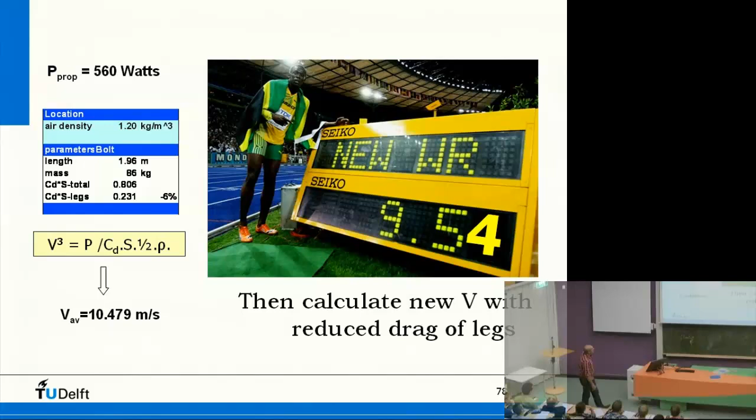Friday, next Friday, I think Hester will be here as well.